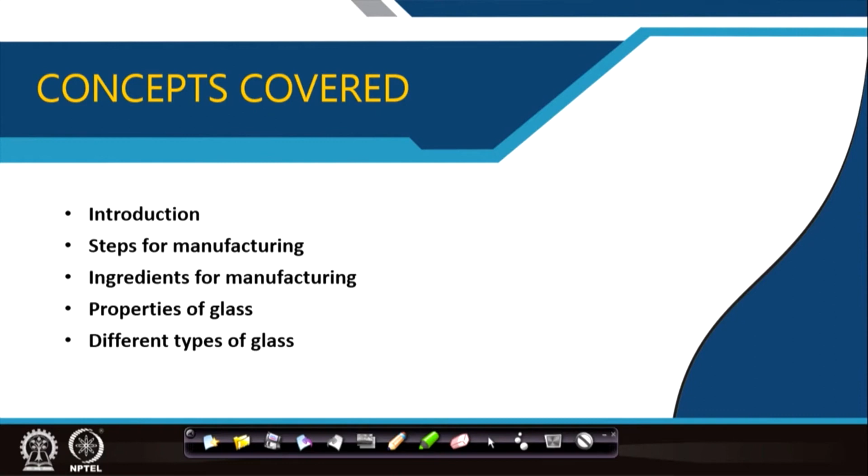So, coming to the introduction, what is glass? It is a supercooled liquid, it is amorphous in form. It does not form crystals, but even then it has random and tightly packed atoms, and that structure makes it brittle. So, it can break because the bonding as a crystalline structure does not take place, and it is homogeneous in texture. As I told you, it is transparent. So, any kind of impurity in it would be visible.

So, if there is an air bubble entrapped while the glass is being made, then it will be visible. If a small particle, maybe a small stone particle or any foreign or metallic particle, remains embedded in it, it will be visible by naked eyes. So, one is you have to get it clean and clear. Another is it is expected to be perfectly flat. If you hold a glass piece horizontally and look at it at its horizon, you may find it is a little wavy. So, when someone is on the other side, it may not give a right image. So, glass may be a little wavy; that also can be tested.

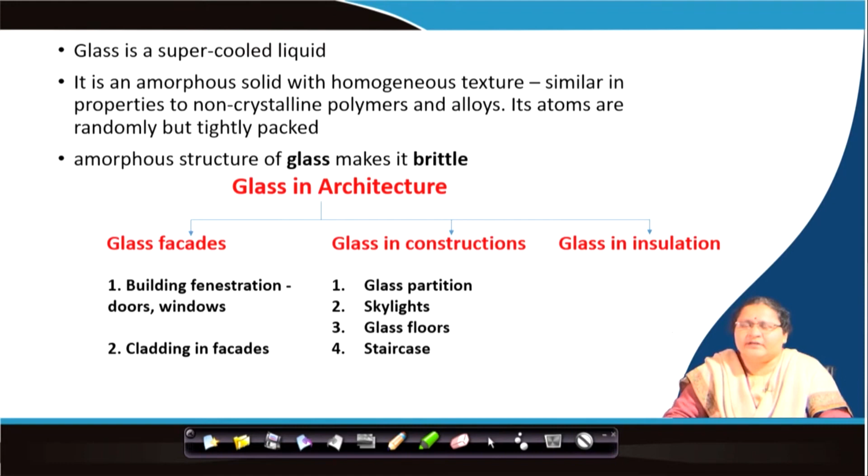Now, glass in insulation, we have glass wool, which are threads or strands of glass which are used as insulators. We will discuss that a little later. So, you see the use of glass for viewing. We all know the window, it is crystal clear, you can see the outside mountains from the inside. We can use glass as a shelf. You can see such shelves in shops, in showrooms, even in small grocery shops.

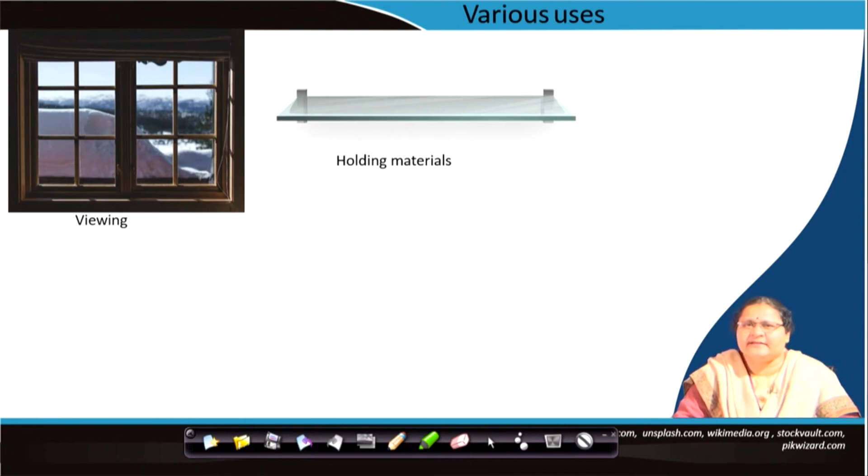There is a glass top where, since you can see what is below it, the display is better. So, the shopkeeper puts glass as the top on which he actually displays his items. At the same time, you can see what is inside. You can have glass as a guard wall. So, instead of having a conventional railing, you can create a transparent wall through which one can see what is happening below. So, it is guarding, but at the same time if something hits on it, it will not fall or break.

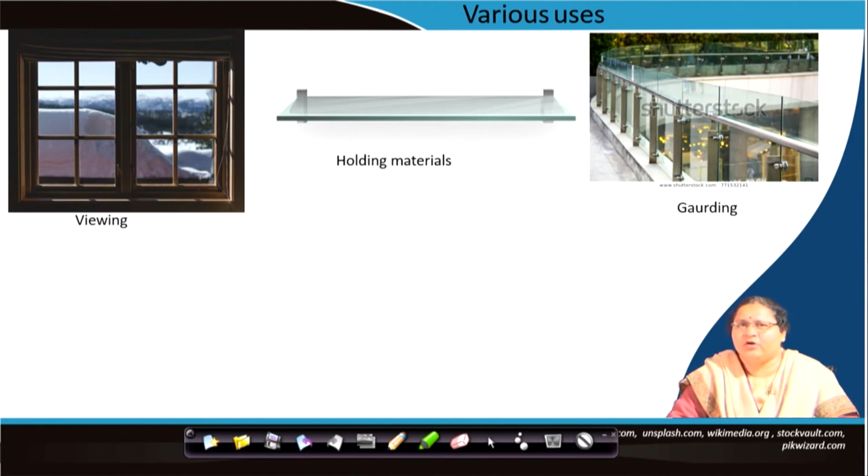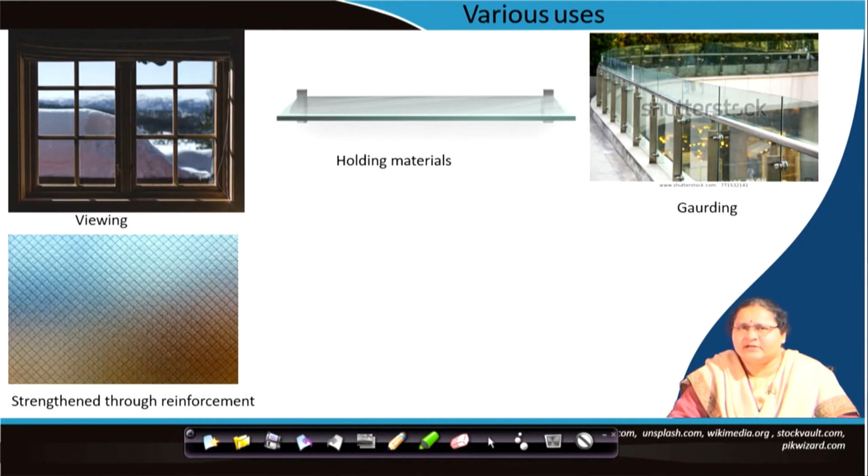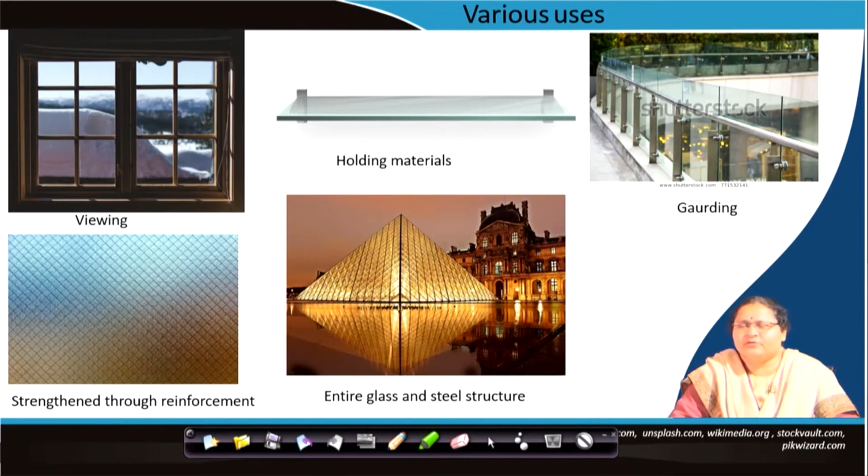We can see strengthened glass through a mesh inside the glass. So, this gives reinforcement to the glass. So, if this breaks, then also there will be a certain characteristic. We will come to that later. You can see an entire glass and steel structure in front of the Louvre Museum. This is also a display of glass.

We come to see glass facades without frame, and glass facades with frame. So, glass has been put inside a framing system. In the picture here, you can clearly see the strong frame lines, of which a portion is openable. Here, you do not see the frame.

You can see glass fiber as reinforcement in some corrugated item. These fine strands which you can see inside it are all glass fibers. So, these have strengthened this corrugated surface. It may be in plastic, you get glass fiber reinforced plastic. So, we can use glass in different ways and all have a purpose in buildings.

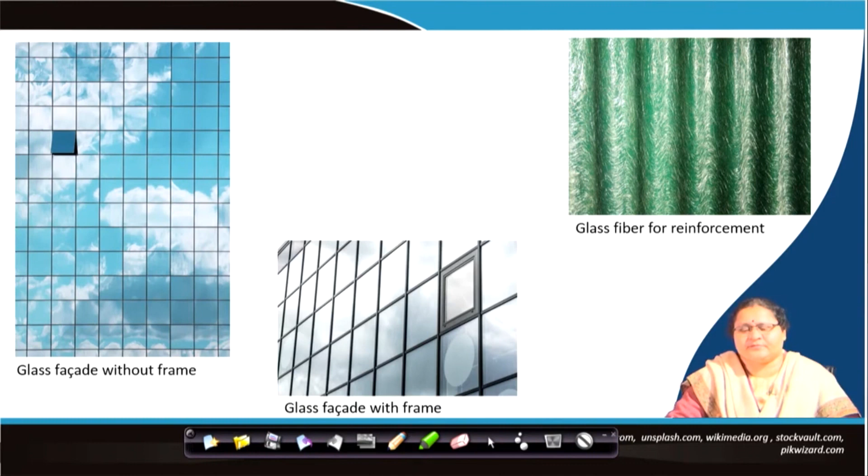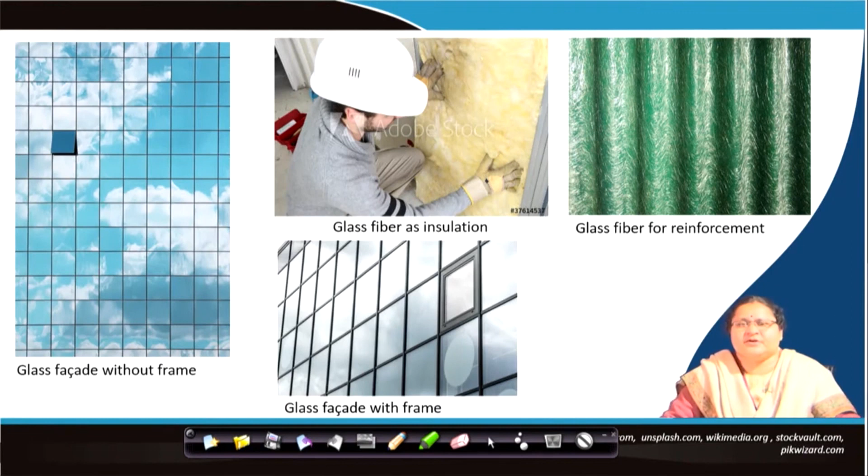So, we have to know them one by one, but before knowing them, okay, here is another picture of glass fiber being pushed in a wall for insulation. You can see some woolly material pushed in. As you see, the person is wearing thick gloves and even his eyes are protected with a proper helmet. So, it is a soft, woolly, cotton-like item, then why is he wearing these? It is glass. That is why he needs to protect himself. There should even be a mask, because these thin strands of glass may be inhaled.

Now, after that is the stage of forming and shaping. It will be a viscous material coming out, and then at a temperature of 800 degrees centigrade, there are a number of ways you can form it. One is by blowing, one is by flat drawing, next is compression molding, then spinning to get fibers, and another is annealing to get different strengths. In blowing you can get the desired shape, and the glass has to be allowed to cool in that particular shape, and then it becomes the item of that specific shape.

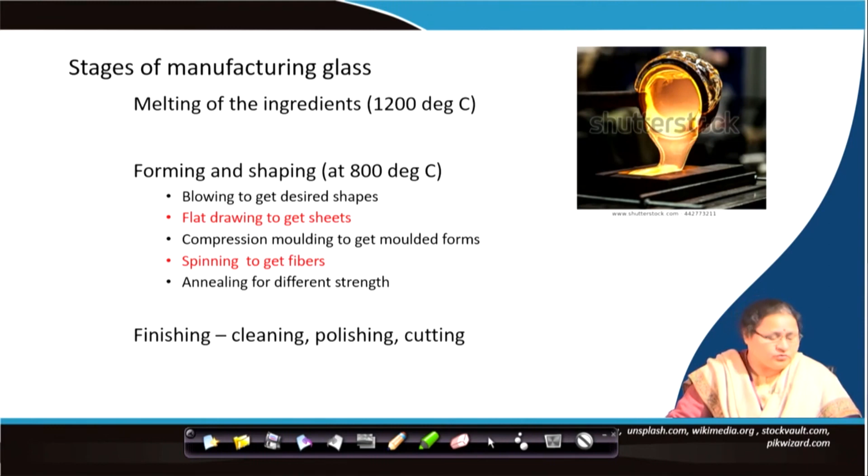Once we get these, we go for the finishing, which is cleaning, polishing, cutting. So, you have to clean the surface, even if required polish it, and finally cut it to get sharp edges. If you see a glass piece in the cross section, you will see it is light greenish in color, slight green in color. It is because of the iron oxide in it. This iron oxide is coming naturally, that gives it that greenish tint, greenish color. But you can also add mineral oxides or metal oxides to get different colors. So, we will come to all those almost at the end of this lecture.

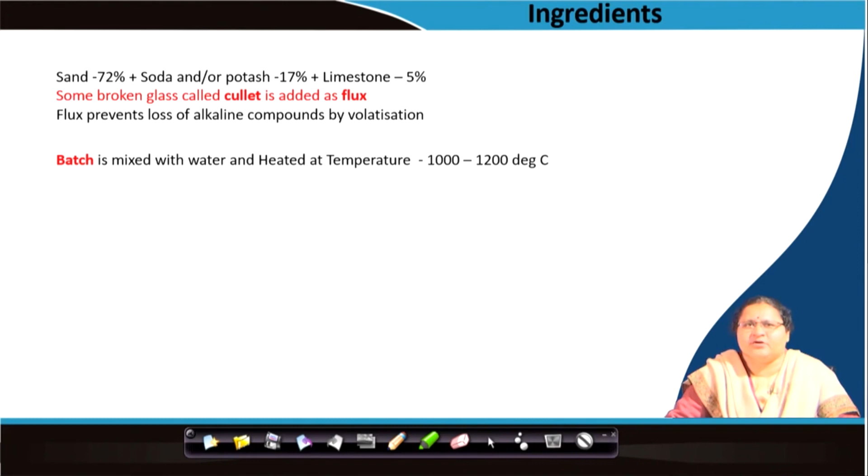Now this sand, soda, potash, limestone and this cullet, these are all finely ground, and this entire mix is called batch, which is mixed with water and heated to a temperature of 1000 to 1200 degrees centigrade. Carbonates of sodium and potassium are added to it, which reduces the melting point of silica. So, the melting point of silica comes down from 1700 degrees centigrade to 1000 degrees centigrade. So, this reduces the furnace temperature. So, you add carbonates of sodium and potassium to get such energy saving. It makes the liquid silica more workable and viscous. Because you have to draw it, it has to be workable and its viscosity should be maintained.

You see, here are the functions of soda, potash, oxides of iron, coloring agents, where you see soda is the accelerator of fusion of glass, potash makes it resistant to fire, even borax makes it resistant to fire. We know borosilica, so borax and silica, that makes it fire resistant. So, by adding oxide of iron, oxide of lead, you can change hardness, you can change brilliance, you can change color. Brilliance as in glass which are made for manufacturing lights, which is not our domain. So, we can use lead to make it more brilliant. The brilliance increases by adding lead.

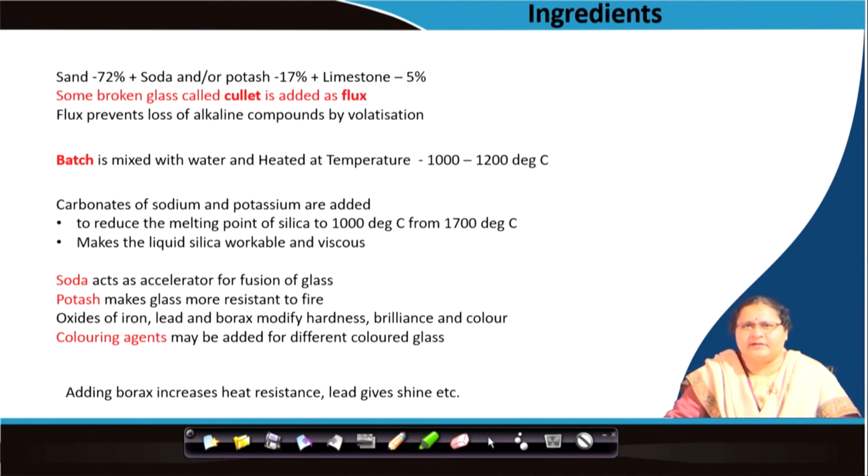So, let us come to the properties of glass. As I told you, glass is transparent, thin as compared to other building materials. So, now as it is thin, you also need to know its thermal property. It is brittle due to its amorphous structure, that also I discussed. It is not affected by ordinary chemicals, reagents, air and water.

So, it is impervious. It does not allow air and water to pass through it, and it is not affected by acids. Yes, affected by alkalis to some extent, but not at all affected by acids. So, this is a very good non-reactive item which is to be used in laboratories, used in medical hospital areas, pathological laboratory, chemistry laboratory, biological laboratory.

It does not absorb any kind of microbes, so it gives a stain-free, completely clean, clear surface. Its hardness and reflective power can all be altered by treatment. Reflective power means it will reflect the light, and it will transmit some portion of light. We will go into those when we go into the different types of glass. Glass can absorb, refract, transmit light and also reflect light as required. Its specific gravity is 2.5.

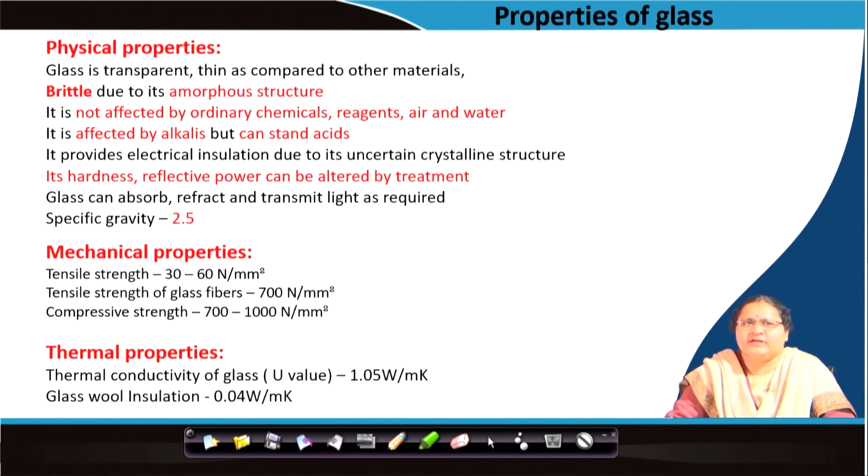Coming to thermal properties, the U value of glass is 1.05 watt per meter degree Kelvin, and it varies from 0.8 to even 1.25. I am giving you the average value, and parallelly, glass wool has a much reduced value. It is 0.04 watt per meter Kelvin. So, in glass wool form, it is actually giving a lot of insulation.

Now, we come to the workability of glass. Can we work on glass similar to wood? Can we cut it? Can we weld it like other metals? Yes. Can we cut it? Yes, you can cut it into desired sizes. Can we drill it, drill some hole in it? Yes, we can, but not for all types of glass.

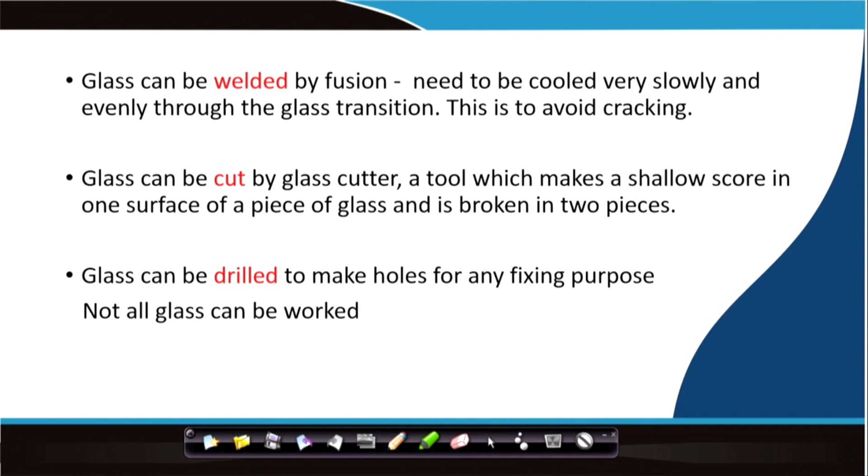Related to welding, we must be very careful, glass being brittle. Through the glass transition temperature, you need to cool it very slowly, because in a welding operation there is a temperature gain in the local area where it is being welded. So, when you are welding two glass pieces, local heat is generated in the central part where you are joining. So, you cannot go for very sudden cooling. If you go for very sudden cooling, it will lead to cracks.

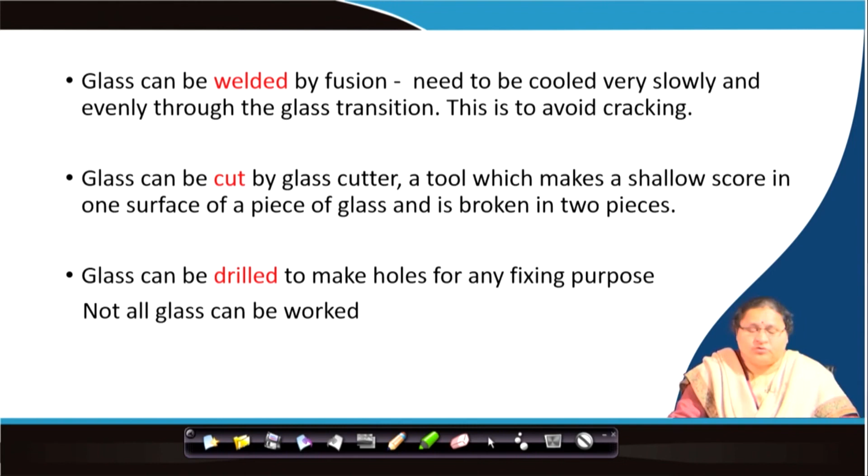Same is for drilling. When you are drilling glass, you cannot treat it like drilling through wood or brick, because it is a fragile or brittle item. So, you have to be particularly cautious; the workman actually knows the ways. But yes, you can weld glass, you can cut glass into your desired sizes, you can drill glass. These three things which one needs to do in building are to be known to you as would-be architects.

Let us come to another property, the solar heat gain coefficient or SHGC of glass, which is also called the G value. It is the ratio of the solar radiation transmitted through the glass surface to the incident solar radiation onto it. So, if there is a window with one glass pane, the transmitted solar energy inside the building divided by the total energy incident on it is its G value. So, it is a ratio, and it is between 0 and 1.

If the glass transmits the entire energy, then it will go to 1, and if it is checking or not allowing the radiation to get inside the building, then you get better control of the solar energy. So, the higher the value, the more solar energy is transmitted within the building through the window. Reflection, absorption and transmission, these three factors affect the solar heat gain coefficient.

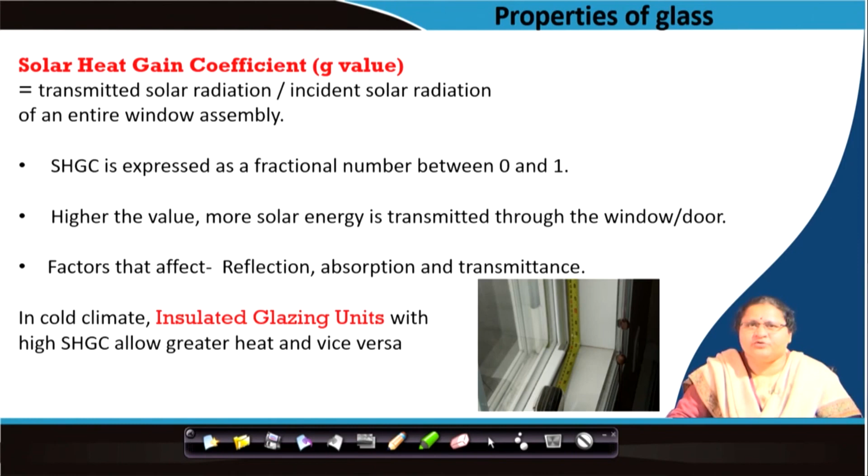In cold countries, one looks for a higher G value. For hot areas, we want to cut it down, so we look for most of it to go out. So, transmitted solar energy should be lower than the incident solar energy. This is a particular quality of glass when it is in a glazing system. We get different kinds of solar heat gain coefficient. We will come to this part later on.

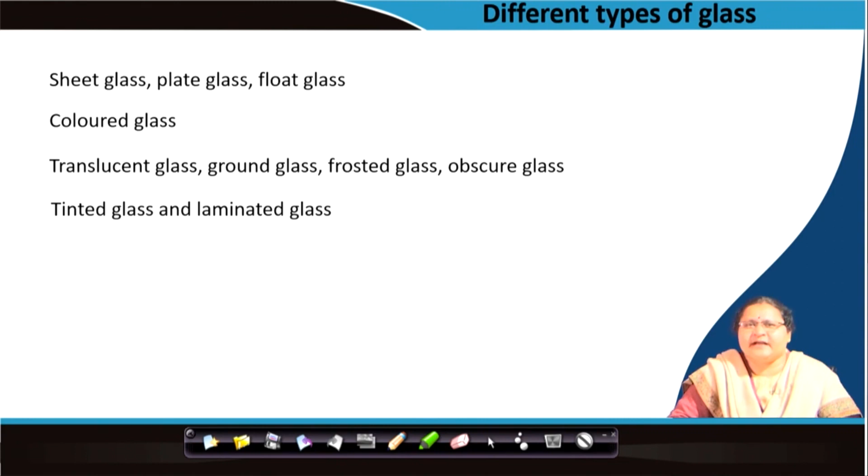Now, let us look into the different types of glass, which we will elaborate mostly in the next lecture. We have sheet glass, plate glass, float glass. We have colored glass, which I have already told you about. Translucent glass, ground glass, frosted glass, obscure glass, these are almost the same kind of items. We have tinted glass and laminated glass. We have reinforced wired glass. We have tempered glass. We have switchable smart glass, and we have hydrophilic and hydrophobic glass.

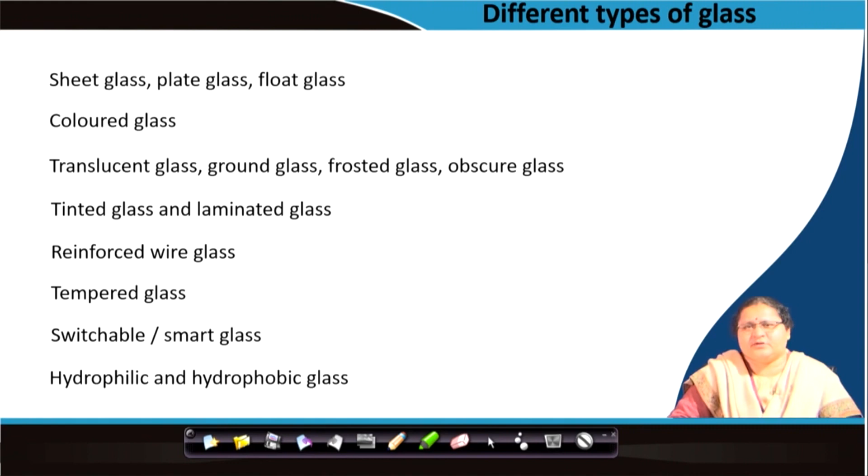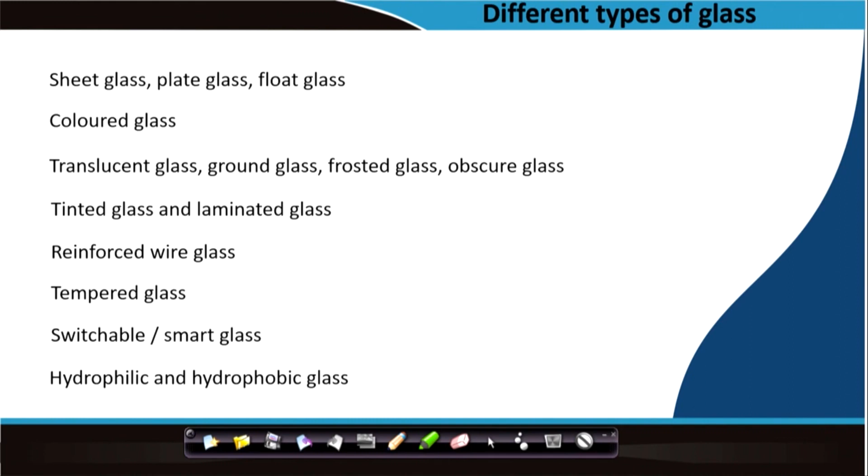So, you can understand that it is not one type of glass being used for a particular building. For different types of building with different purposes, we can use so many types of glass, which we will elaborate in our next lecture.